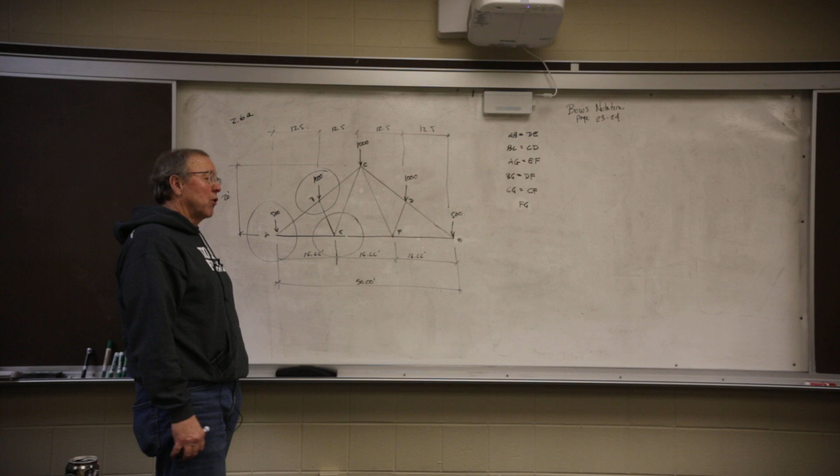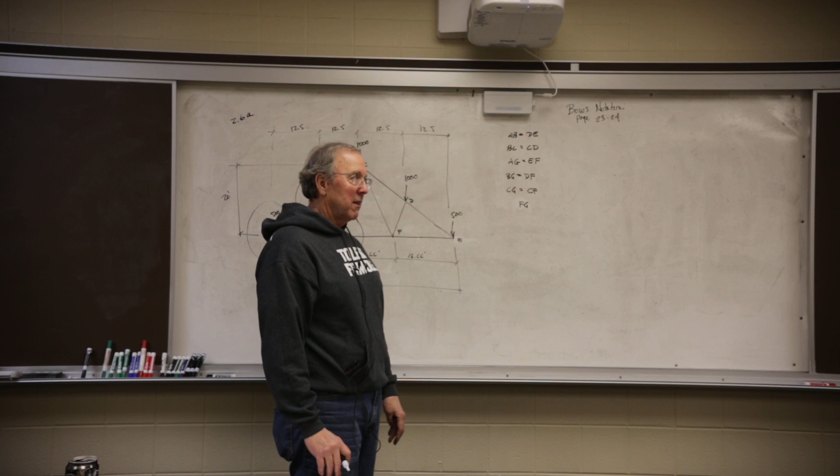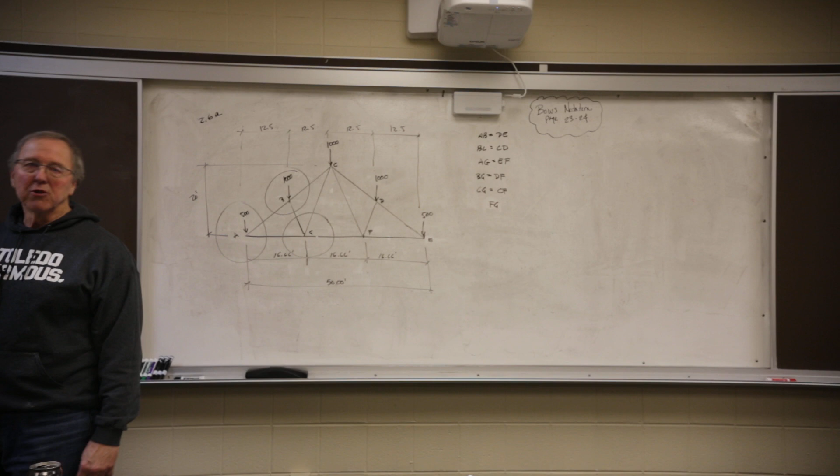First thing, I had several people ask me about the labeling. I corresponded back, but these kind of things are things that you've got to be able to deal with yourself. People that are employing you don't want to listen to this. If you'd have gone into your book and had any notion that your book addressed this and created the problem, if you'd have gone to page 23 and 24, there's a little thing right there that tells you exactly how to use Bow's notation. All you got to do is look at it.

Some of you take it as an excuse not to do it. That is not what employers want. They don't want excuses. They can get those anywhere for free, they don't need to pay you for them. So don't look at it as a way of getting out, it's an opportunity to learn. Go to the page, look at it, it tells you what to do. I told you to do it this way, so I will.

Just label the joints, okay? It's as simple as that. Those joints don't know that I labeled it A, I'll guarantee you that. You label it something that you want to use that keeps records. It has nothing to do with anything at all. If this is A or Z, it's still the same joint.

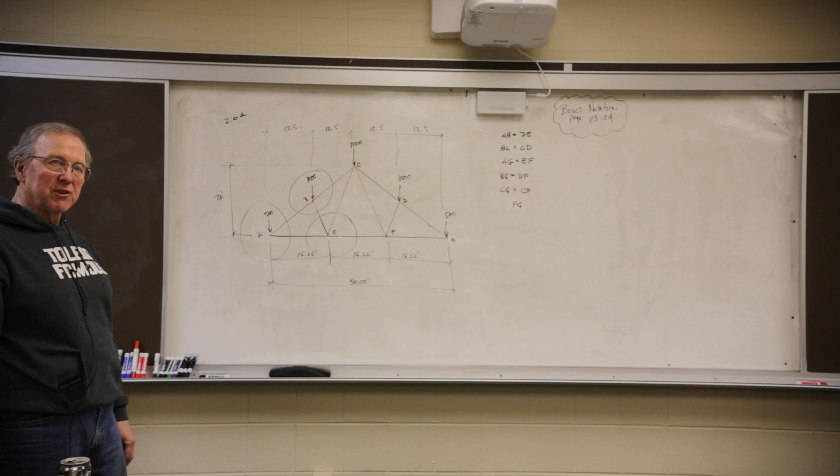So take a look at the problem and use it as a learning opportunity instead of a way of getting an excuse to get out of work. That's not good, and it's a way people lose jobs. Okay, so let's go about it. I'm going to go through this step by step. This is a relatively difficult one as far as students are concerned.

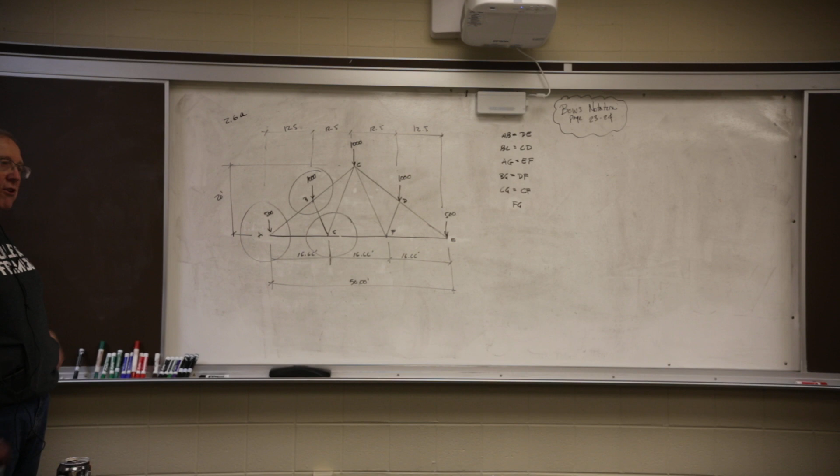I'm going to take a look at it and I say, gosh, that looks like it's symmetrical. Then I look at the loading and I say, my heavens, not only is it built the same, it's loaded the same. If it's built the same and loaded the same, what do we do? We add up all the loads and divide by 2, and we've got the reactions. So 500, 1,500, 2,500, 3,500, 4,000. 4,000 divided by 2 is 2,000.

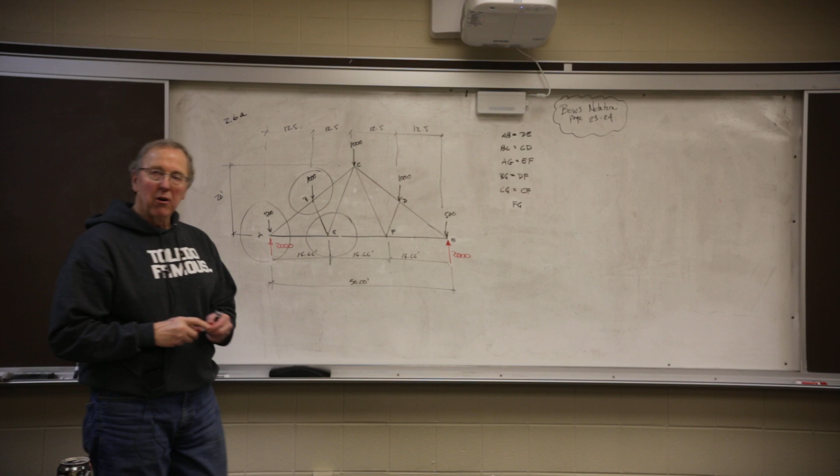And if it's got a roller, it doesn't matter if it's a hinge and a roller here. Why doesn't it matter? Because there's no battered or horizontal forces, their X's are all 0. So there's your picture, okay?

Now we do a quick survey. We look and see, are there any joints where the forces are only at right angles? Where they come together like this, or like this, or like this. Are there any of those where we've got right angles? And I look at that thing and I say, heavens, no, everything's got an angle. So I can't do anything by visual inspection. It's impossible because I don't have a way of taking this and changing it into 2 vectors in my head.

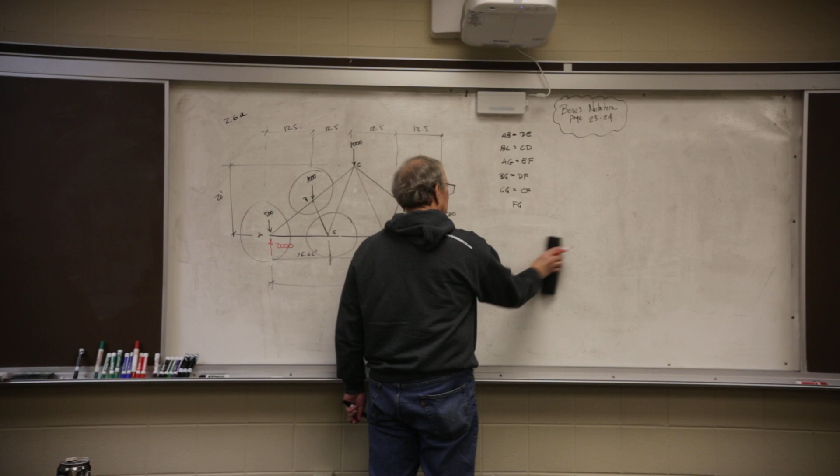So inspection's out, now I got to start at a joint. And I look at it and say it's symmetrical. So do I start at A or E? Doesn't matter. I made a list right here. It's symmetrical, so this one and this one are the same, this one and this one, this one and this one, this one and this one, this one and this one, and that one's a loner by itself.

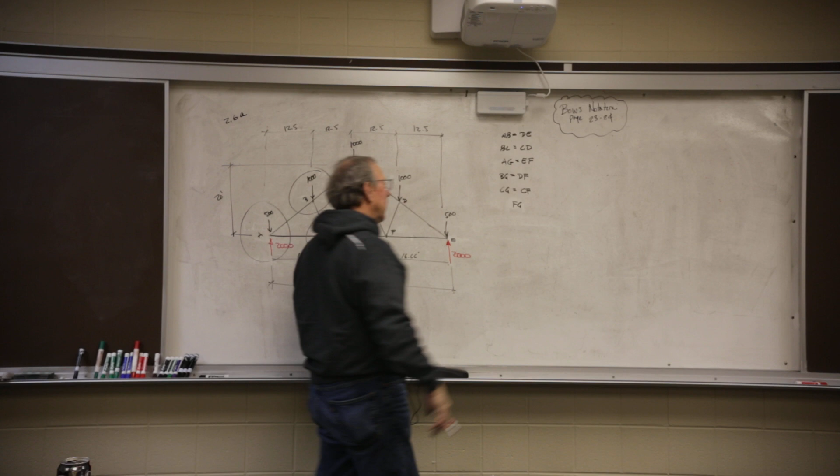So all I'm going to do is calculate half of this. Looks like 3 joints and the problem's over. So I'm going to call this joint 1, call this joint 2, I'm going to call this joint 3.

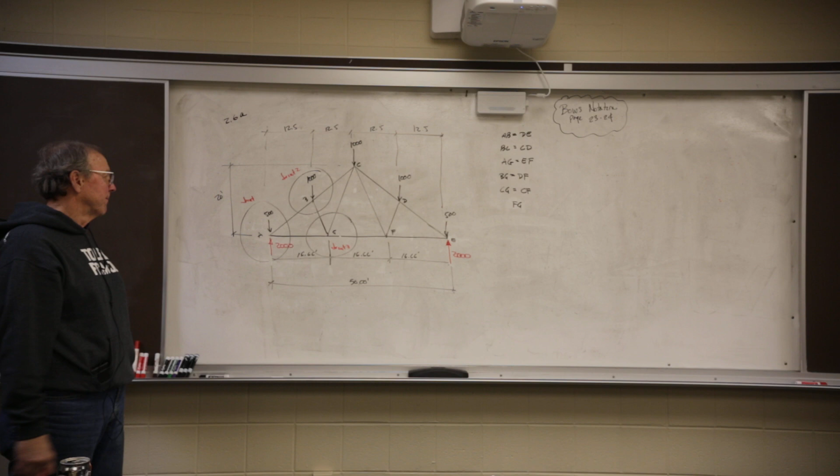Which joint can I start at? Known, known, unknown, unknown - 2 unknowns, I can start there. Unknown, unknown, unknown, known - 3 unknowns, can't start there. Unknown, unknown, unknown, unknown - 4 unknowns, can't start there. I'm railroaded into a position where I can only start at one spot.

I elected to use the left half. You like the right half, use it - doesn't matter. So I'm going to take joint 1, and I'm going to draw it exactly the way it is.

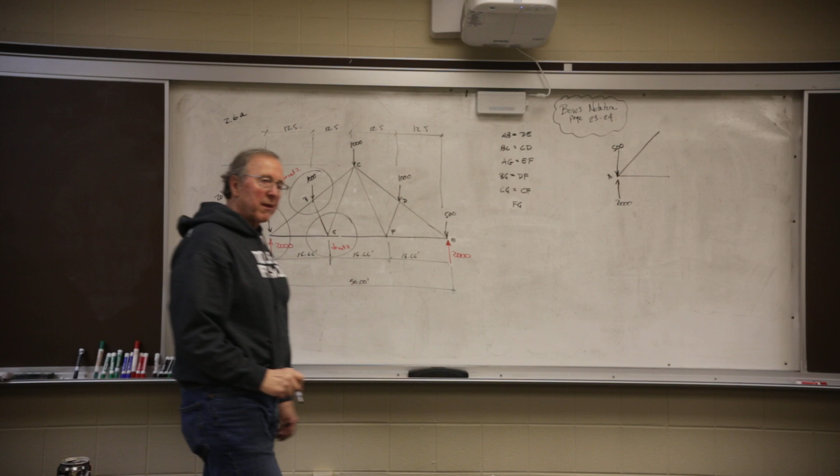The book told you, or one of the videos told you, to just assume positive for the first joint. So I'm just going to assume positive, or pulling it out. I'll put this here, I'll put this there. And that has ends of AB, so this is AB. And it has ends of AG, so this is AG. I'm going to take and just add them up. There's joint 1.

It's easy as summing x's and y's. So I go about doing it. Sum of the y's have to add up to 0. Minus 500 plus 2,000 plus ABY has to equal 0. That looks good to me.

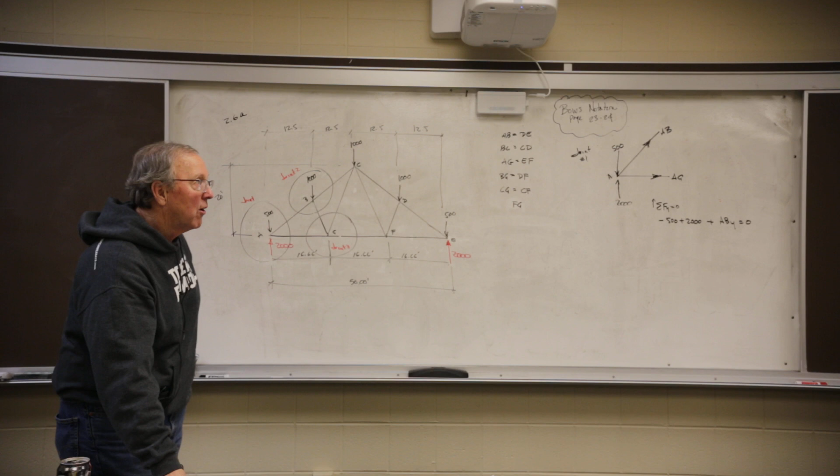Okay, ABY. Now you got a choice - you either can draw a slope triangle or find the angle. I got slope triangle for this guy. If I ask you in the office to make me a cut list for each part in this truss, and I ask you how long is piece AB, how would you figure it?

It's exactly the way you do this. So I'm going to take a little dotted line, drop a plumb bob right there, perpendicular, and put a dimension right here. That dimension is 12.5. So if I wanted to figure out the length of AB, there's 1. And if it's 20 foot high and it's constructed the way it is, that means this is 10 foot high.

That is not a guess. That's using mathematical logic to figure it out. I can prove that mathematically that that is 10. So my little triangle going in here is relatively simple - it's 12.5 by 10. And now I need is a diagonal.

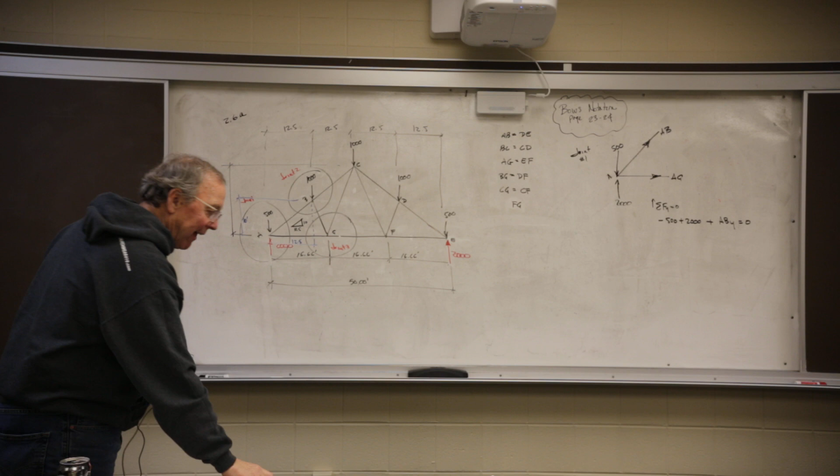So if I wanted to get the angle, I could just take the arctangent of 10 over 12.5. And if I did that, this angle is actually, if you decide to use angles - I don't - about 38.66 degrees, okay?

I use a slope triangle. If you use a slope triangle, you put 10 in your calculator, square it, 12.5 in your calculator and square it, and then take the square root, you get 16.008.

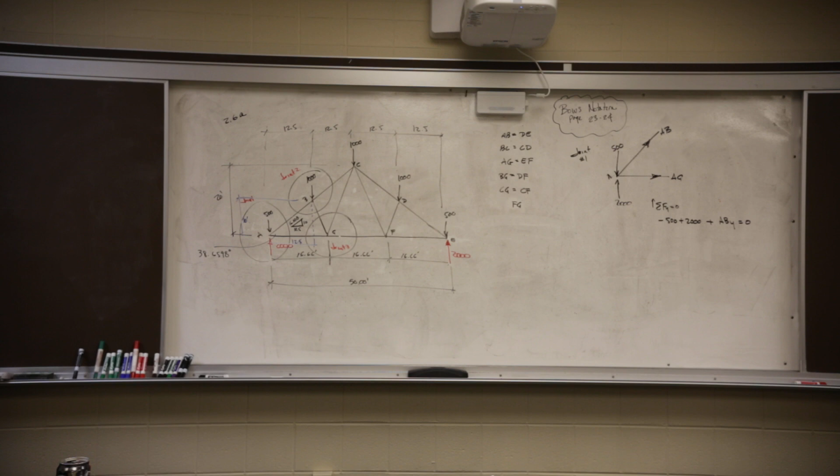So that's how I busted up AB. The y component is 10 over 16, the x component is 12.5 over 16. So I want y, so I want 10 over 16 minus 1,500 plus 10... move the 15 to the other side, turns it into a positive, multiply by 16, divide by 10, and get 2401.2.

Okay, my answer came out positive. The positive means that that arrow is right. So that's a good arrow.

So I'm going to come over here, I'm going to put the arrow, here it is. And remember in class we went over, they come in pairs, either pointing at each other or pointing away. And I'm going to put 2401.2.

There's that one. Okay, the other one, sum of the forces in the x. Oh, none - AG is going to the right. ABX is going to the right. Looks like ABX I got, so I'm going to take AG equals minus ABX.

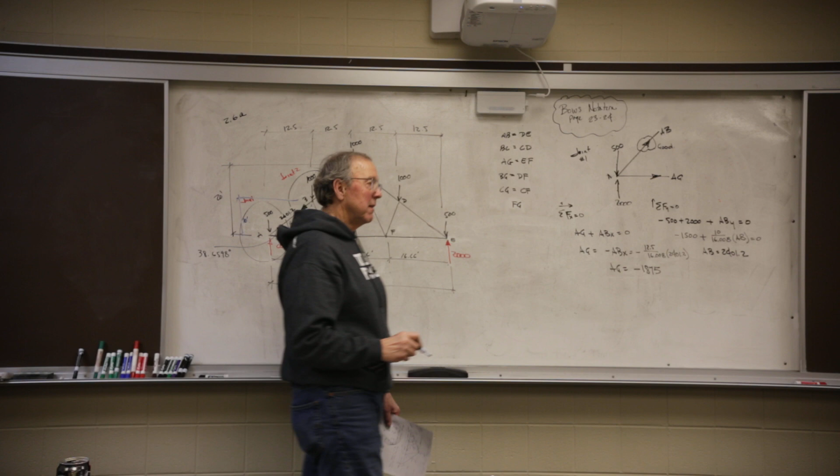What does the minus say? Excuse me. I screwed something up. Where did I mess it up? Let me look at my notes - I got it figured out here.

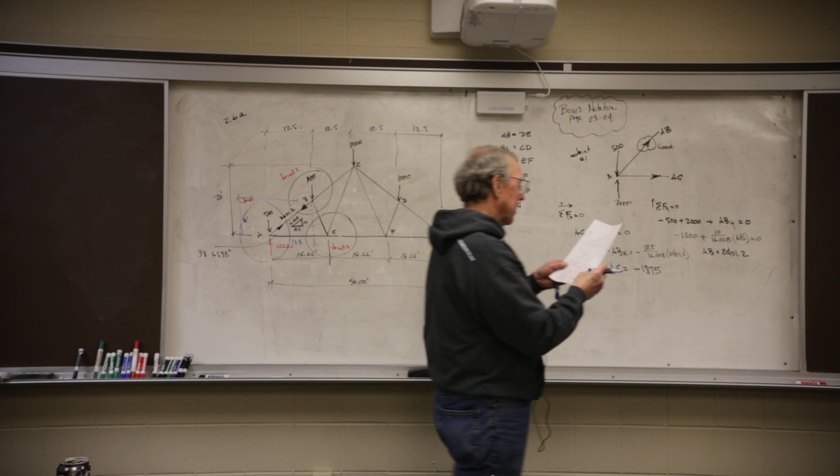Let's see, 2,000, that's good. Oh, I see what I did - this is actually a minus 1,500 on this side. So this should have been a minus, which makes that no good.

Excuse me, I should follow my notes. If that goes that way, then this over here becomes exactly right. These become positives.

Okay, sorry, the numbers are right. Minus 500 plus 2,000 - I was going that way, so it's a plus. If I combine these two together, it comes up to positive 1,500. That's positive here, but if you move it to the other side, it becomes negative. So the answer is negative, which reverses the sign.

That makes that good. When I put it in like that, AG is going to the right, ABX is going to the left. Add it up, you end up with 1875. So my arrows should look like this.

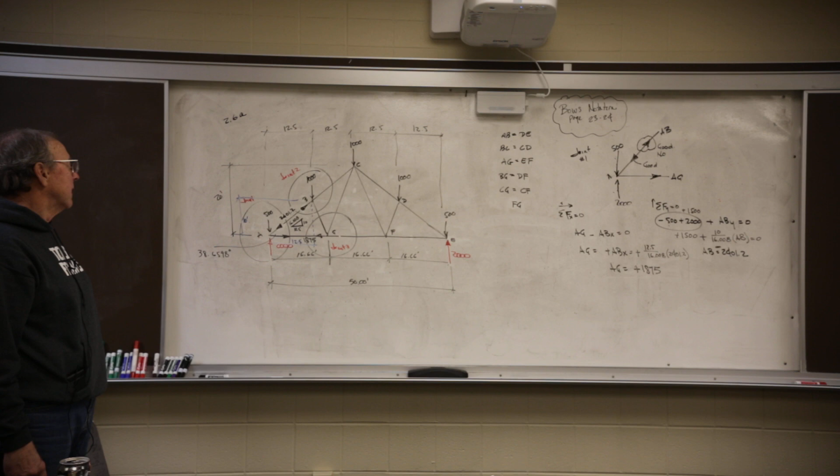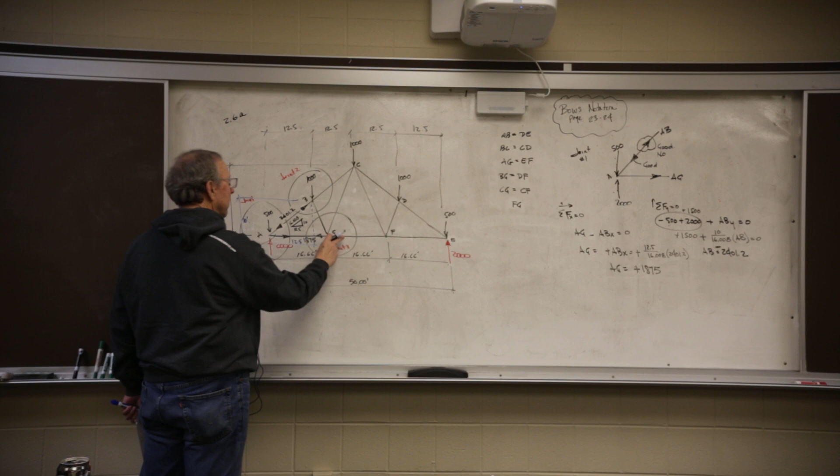And of course they're the same on the other side, so there's two of them. Now, have I got myself in a better spot with joint 2 or 3? Known, unknown, unknown, known - I can do it. Known, unknown, unknown, unknown - three unknowns, can't do it.

So I take and erase this guy, and draw the next joint. The next joint is this guy. He's got one going up like this on an angle, and one going down here at an angle. He's got one right here up and down, and he's got this arrow going this way.

It's got letters of BC here, and letters of BG here. And this is joint 2.

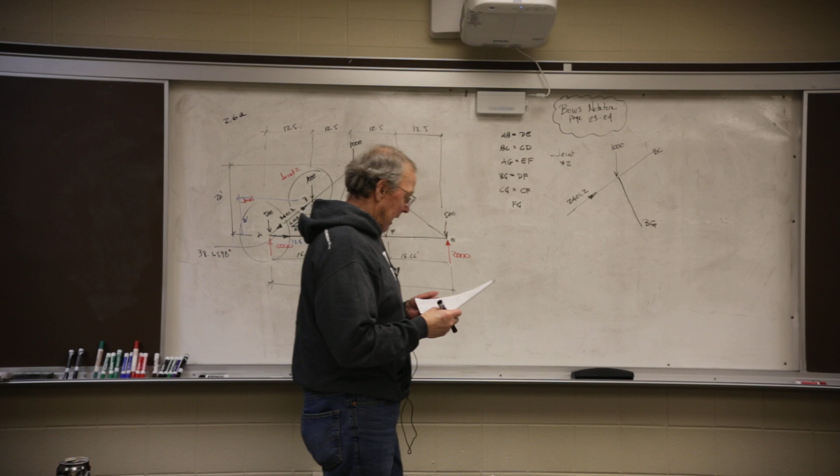Okay, how am I going to mess with this one? Let's see what we can do with it. Make sure I get my signs right - I'm going to use my paper. Okay, I put the arrows on this one. Hopefully you realize that if this is one member, the sense has to remain constant.

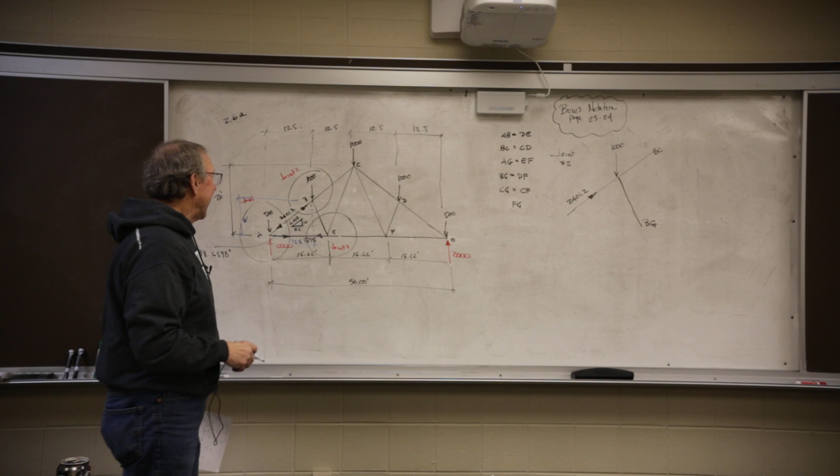So this guy's in compression, so this guy needs to be in compression also. If you don't put them in however you think, it's going to wash - put that one that way. And I don't have a clue on this other one, so I decided to make it this way. I'm just putting the arrow in - don't sit there and think about it the rest of your life. Okay, this one I already figured out.

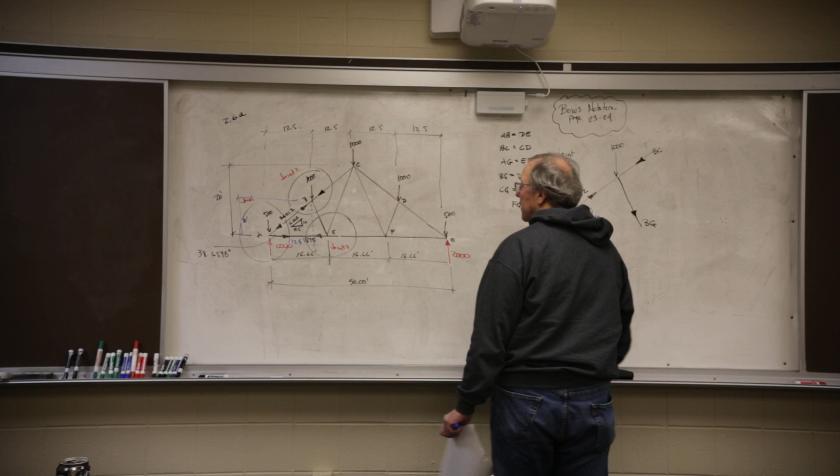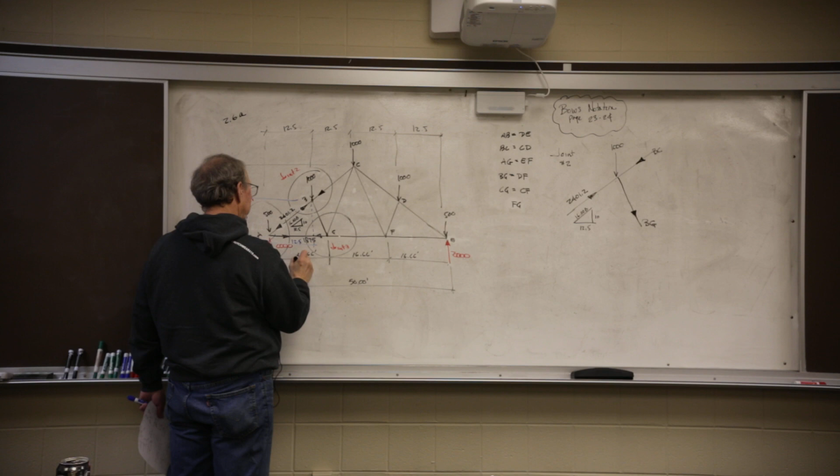That's the same up here - it's the same angle, so it's the same slope triangle. Now I've got that other one. It looks to me, it's right here. So it's 10 high, and it's 16.66 minus 12.5 wide. So that little triangle looks like this to me anyways.

Okay, and when I did this, I came up with 10.833. So there's my two slopes. Now all I do is do the math, and I did it this way: sum of the forces in the y have to add up to 0.

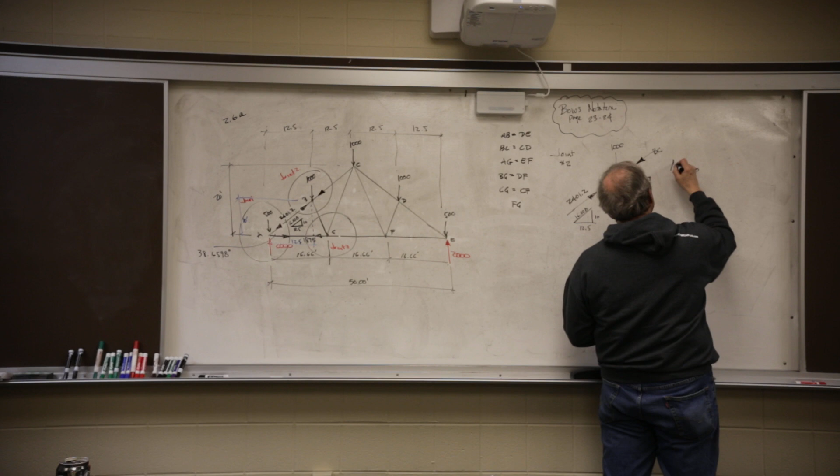I got a minus 1,000 right off the bat - takes care of that guy. And I got 3 more to mess with. It looks like I got 2401.2, that's going up. 2401.2 times the vertical, which is 10 over 16.008. Takes care of this one.

Then I've got what? I've got BC going down, so that's going to be minus BC, and that's going down. And then I got BG, and that's going down, 10 over - there's one of them. And I did the math on that top one.

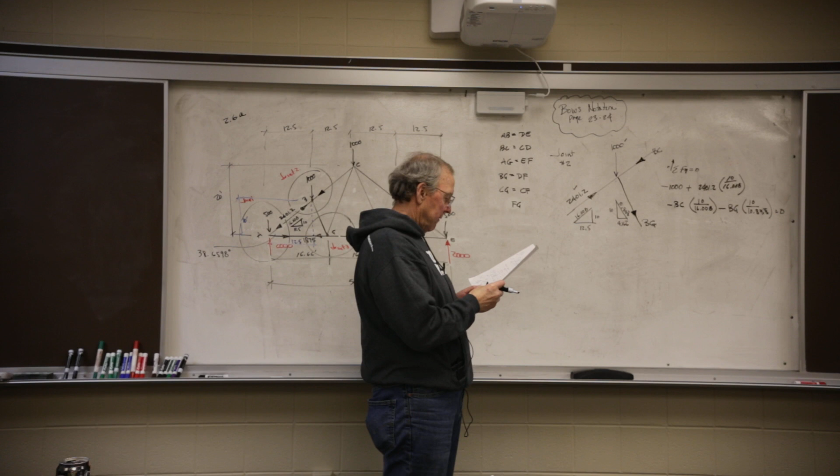And what did I get? I got 5. Let me do the math quick. I've got 10 divided by 16.008, and I got that number, and I'm going to multiply it times 2401.2.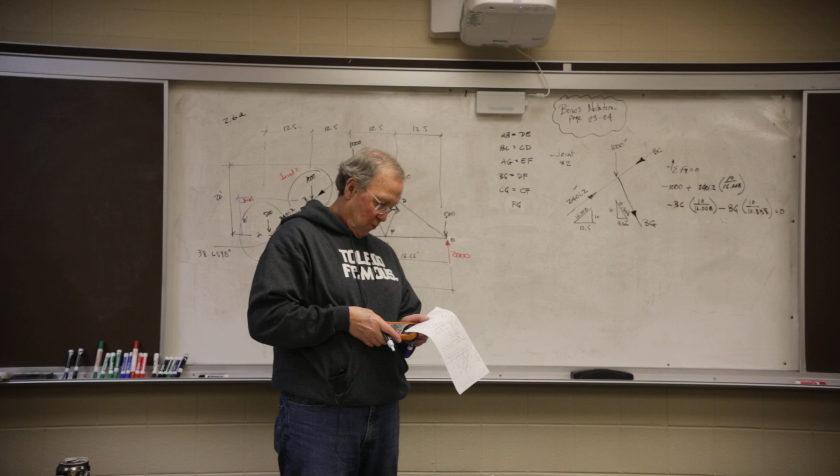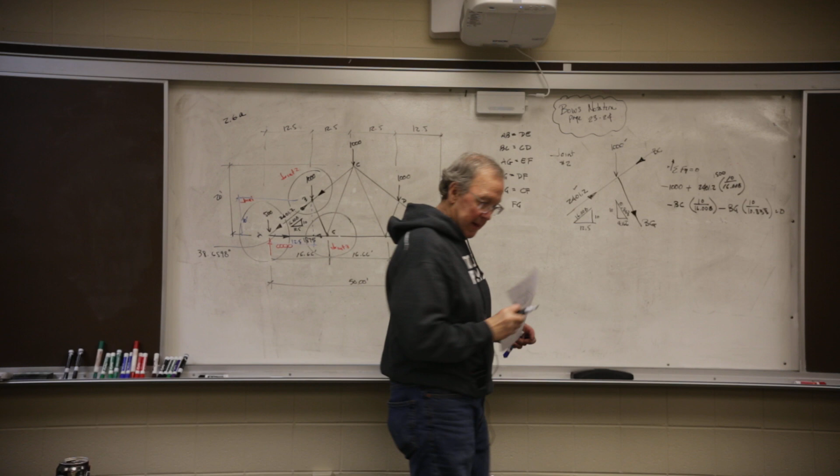1,500 - so this guy right here is 1,500. So the net of those two is positive 500. So I came up with an equation, okay? And you can check it and make sure it's right. The equation for this guy turned out to be the following.

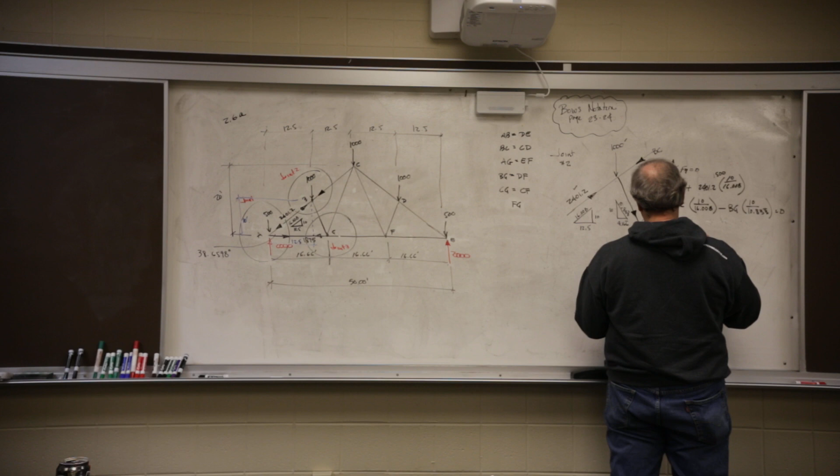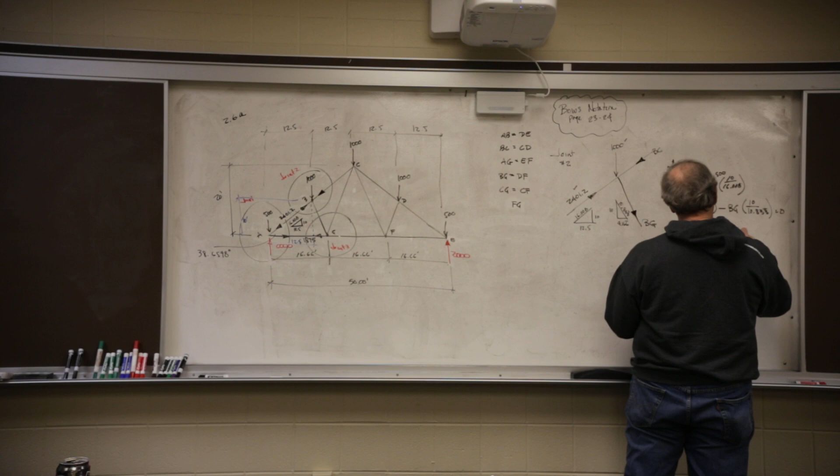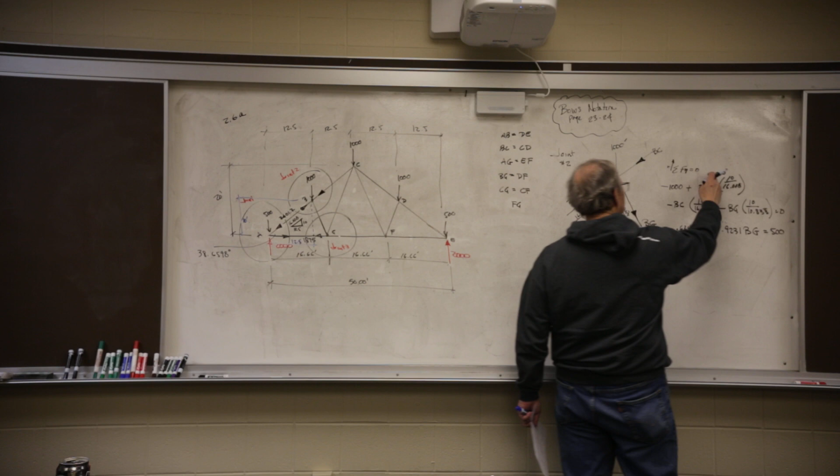That was my equation. I combined - these two combined for 500. I left them on this side. I moved those two to the other side and then flipped it. Then I took 10 and divided it by 16 and got this one. Then I take...